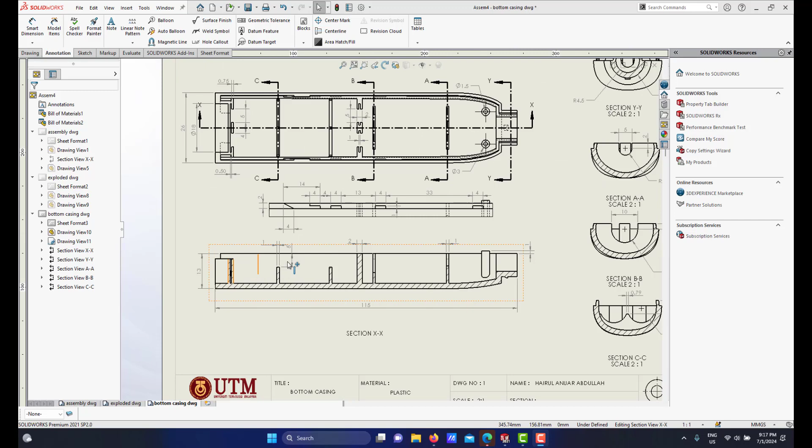Before I show another detailed drawing of other parts, I would like to add some dimensions here because I found out that I need to show, in this detailed drawing, the thickness of this casing, since that's an important feature to show, and also the height of these features here.

Okay, let me bring it in line. Alright, let me save my file.

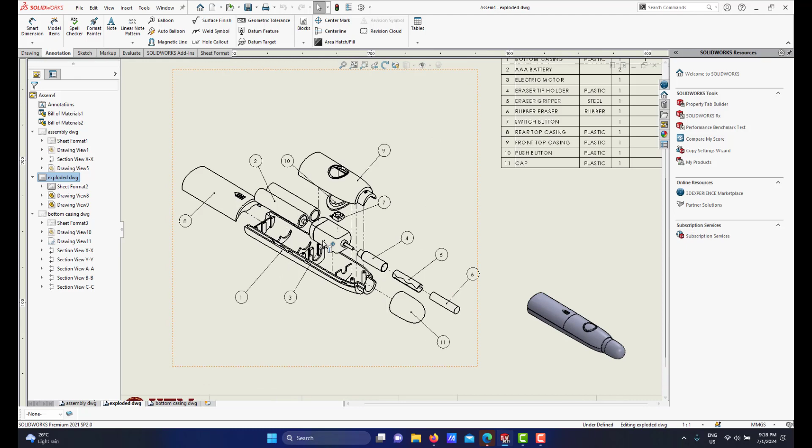Alright, in this video I would like to show you another part. I've already done the bottom casing. Another part is, if you look, the way we do numbering of parts in the bill of material—number 1, 2, 3—is based on the order how we assemble this electric eraser. Number 1 is the base.

Number 2 is the battery. The battery is a standard component, so we don't have a drawing for it. Number 3, we will mount the electric motor, which is also a standard component, so we don't have a drawing. And number 4 here, the eraser tip holder, the gripper, will be mounted on the shaft of the motor.

This is not a standard component. This part we must do a detailed drawing for. It means 4 and 5, eraser tip holder and eraser gripper, we will draw. And the rubber eraser, here, is a standard component, so we will not do a drawing for that.

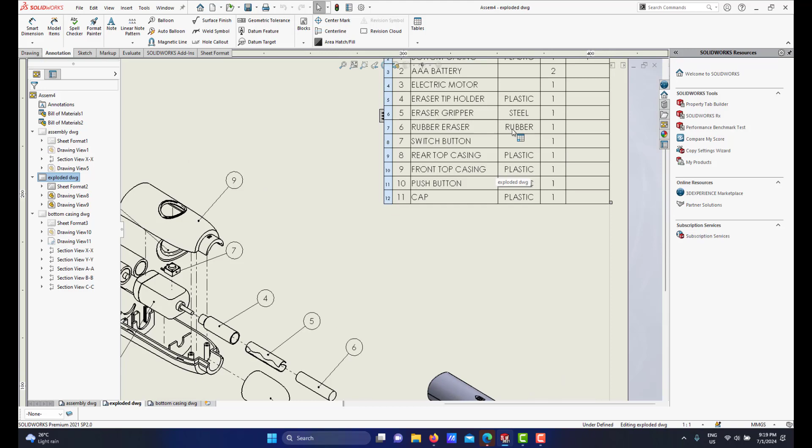About the switch button, number 7, that will be mounted on top of this electric motor—this is also a standard electrical component, so we will not draw it. The ones we need to draw are the tip holder and the gripper, and I will show you how I do separate rear top casing and front top casing drawings.

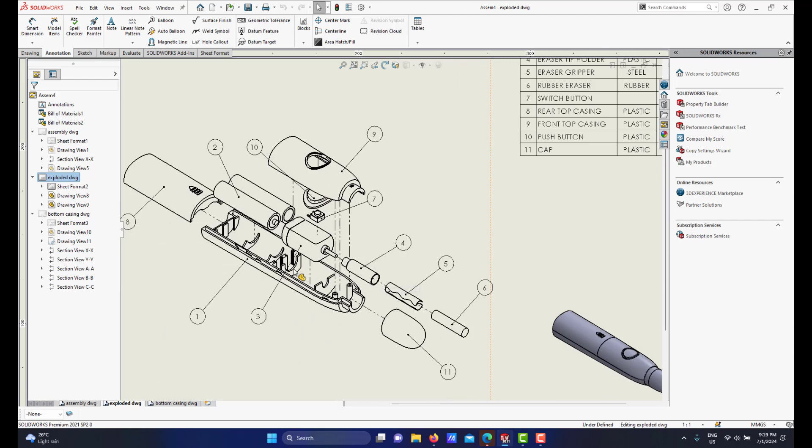But in this video I want to show you how we combine certain small components, which is easy, because in a set of working drawings, sometimes simple components like the eraser tip holder, the gripper, the cap, and the push button can be shared into one drawing. So today I will show you how we do that.

So what I mean is, drawing number 2 will be the tip holder here. This will be drawing number 2. The eraser gripper also will be drawing number 2. The eraser is a standard component, so we don't do that. The switch button is also a standard component.

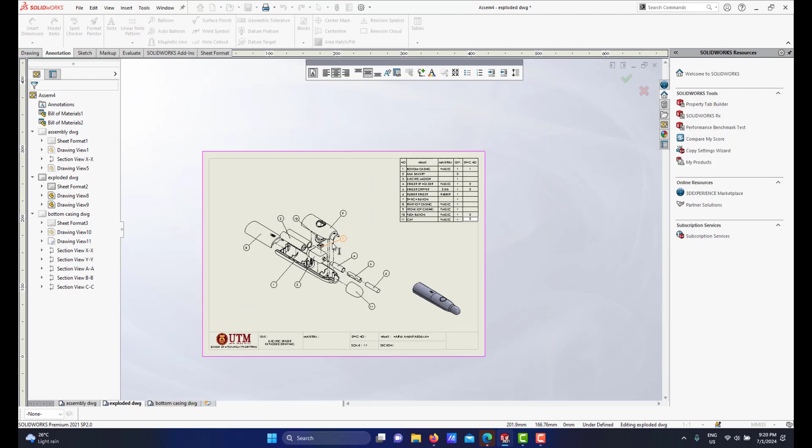The rear top casing will be a different drawing number—I'll show you that not in this video. The push button here will also be shared into drawing number 2, and also the cap will be drawing number 2. So this video I will show you how I do one sheet of this drawing that shares the same drawing number: tip holder, gripper, push button, and cap.

So these things need to be the same here. As I mentioned before, the way I do this BOM is not the most efficient way actually. You can see in other YouTube channels a more efficient way to control the BOM, by setting the configuration of each part file. So I'm just showing you a basic way.

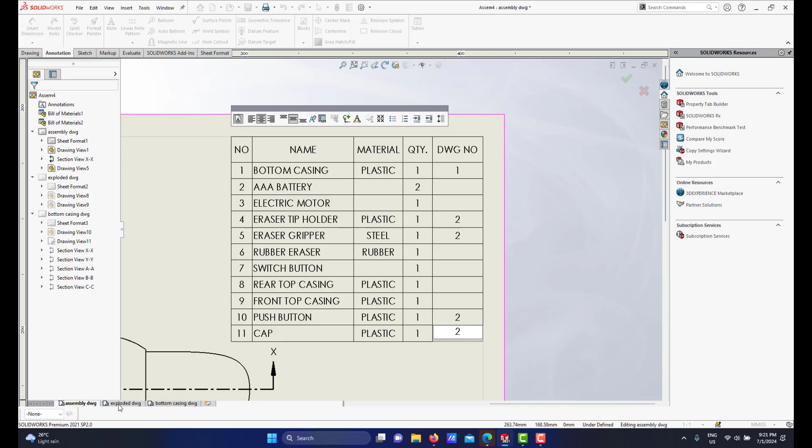Alright, as I mentioned, in the assembly I forgot to put here is the drawing number—bottom casing will be drawing number 1. Same here, the tip holder will be drawing number 2, gripper drawing number 2, the push button also drawing number 2, and the cap will be drawing number 2. So all 4 components—tip holder, gripper, push button, and cap—will be drawing number 2.

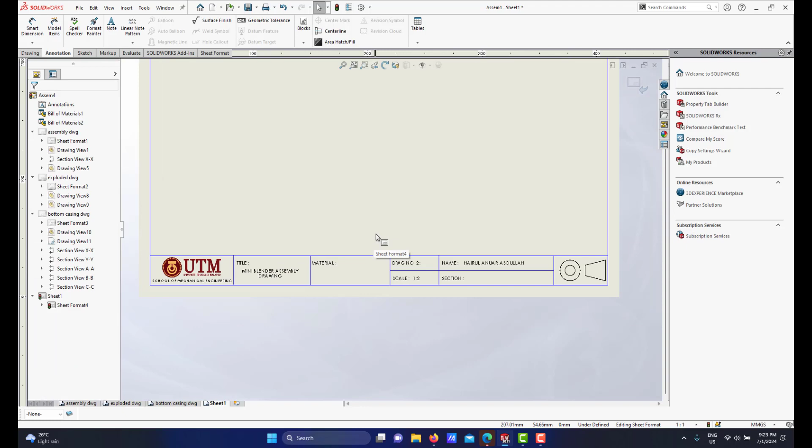So we have 4 components in drawing number 2. I will do the other detail drawing, drawing number 2, since the bottom casing is drawing number 1. So I simply click here, add sheet, so we have a blank drawing with title block already there, but here is drawing number 2. I will edit the sheet format so this will be drawing number 2. About the scale, by default it's a 1:2 scale.

As stated, this is 1:2. I think I will do 2:1 scale because the component of that tip holder, the gripper, is kind of like too small if we do 1 scale.

Also here the title is, because 4 components share into one drawing, so eraser, make sure it's a capital letter, eraser tip holder. We have eraser gripper, and we have the push button, and cap. So these 4 parts.

We are sharing in the same drawing, right? Okay, I go for scale to 1, and material we don't have to put it here because we have 4 components under one drawing. So let me exit.

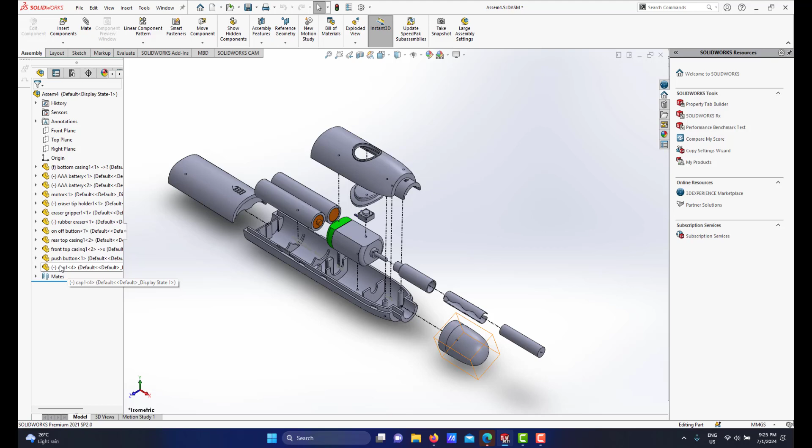But if you know which is your part name and you know how to browse in the drawing, that will be okay, because sometimes opening multiple files uses a lot of memory. But this is the easiest way, because if you open all the parts together, you have all these parts that we want to do for our drawing.

So when we go for this drawing mode, okay, and if you go to the view palette, then if you click at the arrow, everything, the part that you have opened, is listed there. Okay, the first thing I will go for eraser tip holder.

If I select the eraser tip holder, in the menu it will refresh and upload all the parts view of our eraser tip holder. All right, now we have the menu on the right here, all the views for the eraser tip holder.

Okay, before I drag the view, since the eraser tip holder, if you can see the part file, this is the shape of our eraser tip holder. It's a hollow cylinder, a step hollow cylinder, so means that you need to plan the way how you're going to drag which view, appropriate view that will be dragged into this drawing.

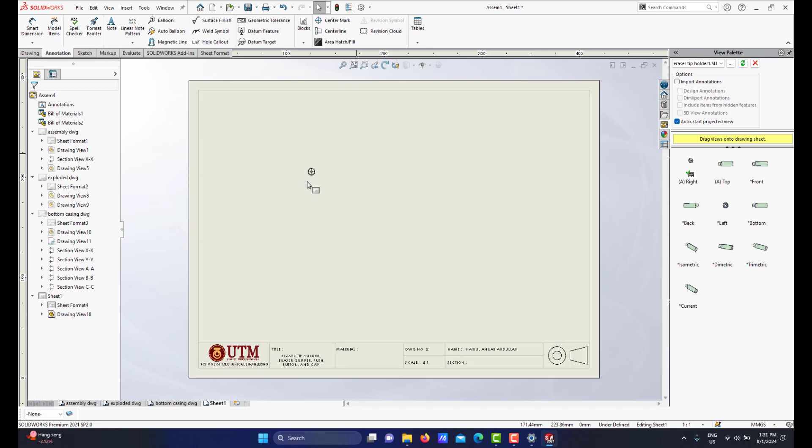Okay, in this case, I will do the right view. Only the right view I drag into this drawing, and I will not go for another view. So I just simply press escape. All right, I have a single view, which is the right view for the eraser tip holder.

So I select this one. The first thing is make sure that tangent edge is removed. And if you look here, the scale by default is 1:1. Scale is too small compared with the A3 paper. So under the setting here, I will do the scale 2 times bigger to 1.

All right, since this right view of this tip holder here is not what I will do, I will do a cutting plane so that on the left here will be the front view, will be the section view. So since this is a right view, this view needs to show the hidden line.

All right, then what I will do under drawing here, I will go for section view, full section vertical. I will select the center of the circle. I click OK, and I will go to the left here will be the front view. Since the view here is a right view, this left view will be the front view, will be our section view.

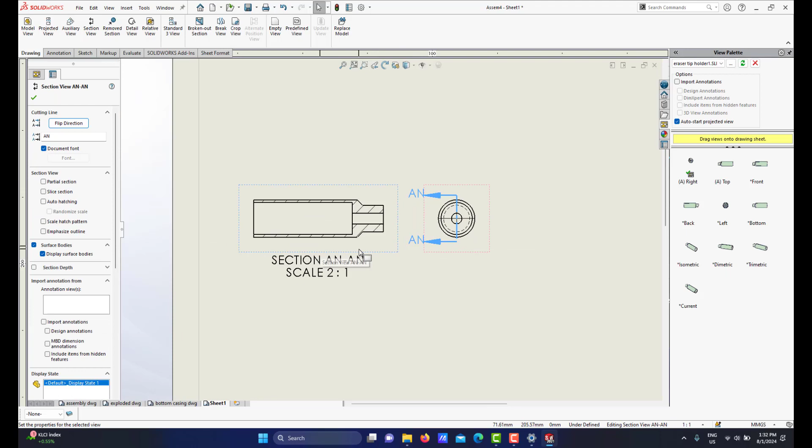Right, and another thing about the label, the label of this is AN, so I just put it X, just click yes. Okay, section at X, and about the direction of this arrow, it's supposed to be flip direction. So now I have the third angle projection of this right view and also the front section view.

All right, one thing is about this cutting plane here. I will right click edit. I will edit the cutting line, and I will edit the sketch, and I will not do drawing. Simply press escape. I make the section line, the cutting line, a little bit longer.

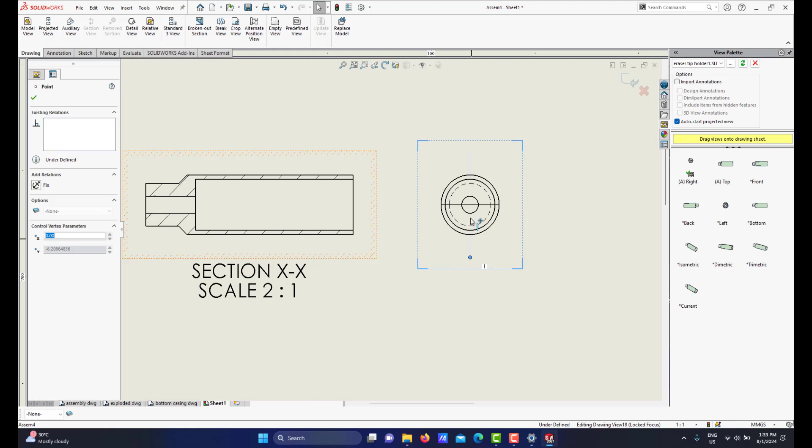All right, I need to set the center mark of the circle. I think I have to do it manually. For annotation, we have center mark. I select the circle—if you look at the menu on the left, if I click center marks, we have a check for use document defaults. I uncheck it so you can control the size.

The tick mark size is 2.54, 0.1 inch. If I go for 1, we get a slightly smaller tick mark. I'll go for 1. If you turn off the extended line, you don't get the extension. In this case, I need the extended lines, so I click OK.

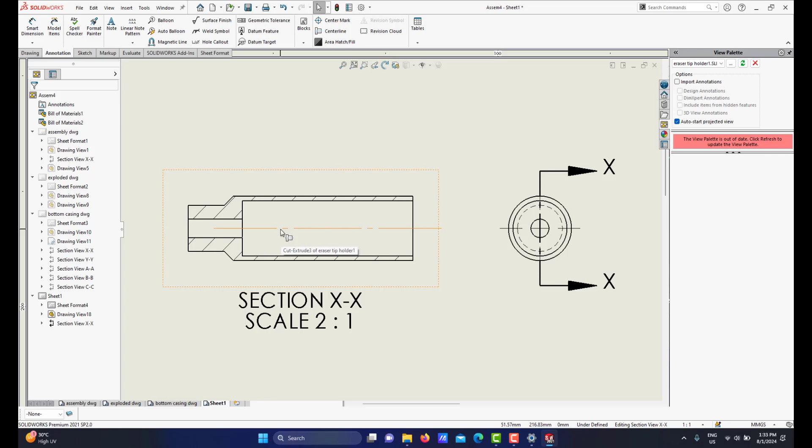Another thing is about the center line. Since this is a cylinder, I need to show the center line, right? Let me drag it a little bit longer, like this.

Since we already set the scale 2 to 1 for this view, the scale label here doesn't need to be shown. So I need to delete the scale. Scale needs to be deleted. I'll bring it downward, then I can put in the dimensions.

This is the eraser tip holder, made of plastic. Since the shape isn't that complex, I can put detailed dimensions on this. Let me show you how I will put in the dimensions.

About dimensions and notation: if I go for dimension, I can get the total length from here to here. We have the icon on either the top or bottom side—I'll go for the bottom side. Then I'll dimension this length here as 19, this line as 20, and this line as 4.

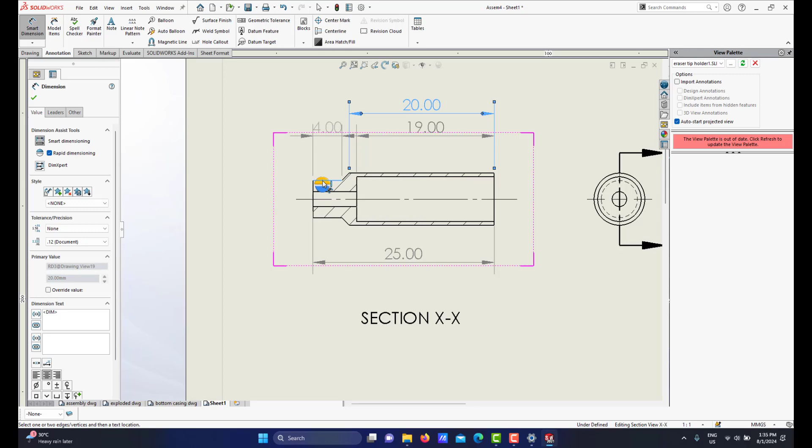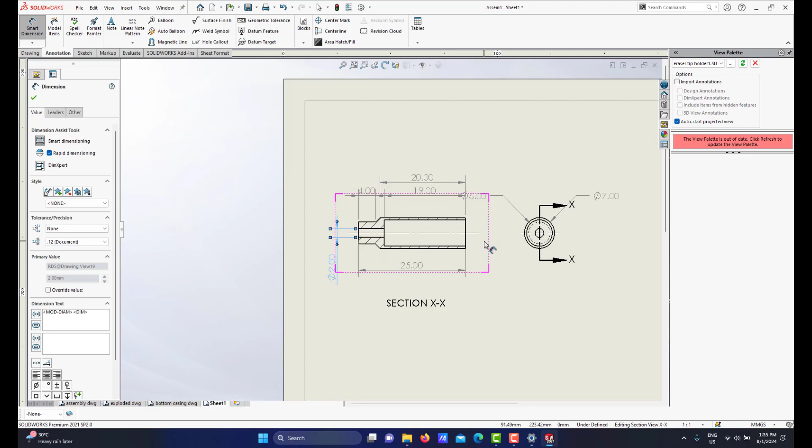Here I can put the diameter 7, and the inner circle diameter 6. And here I can do the diameter from here to here, diameter 2. I need to put this diameter on the right side.

Now let me exit dimension mode and do some adjustment. This one must be set to none, and this one as well, none. Let me pause this video.

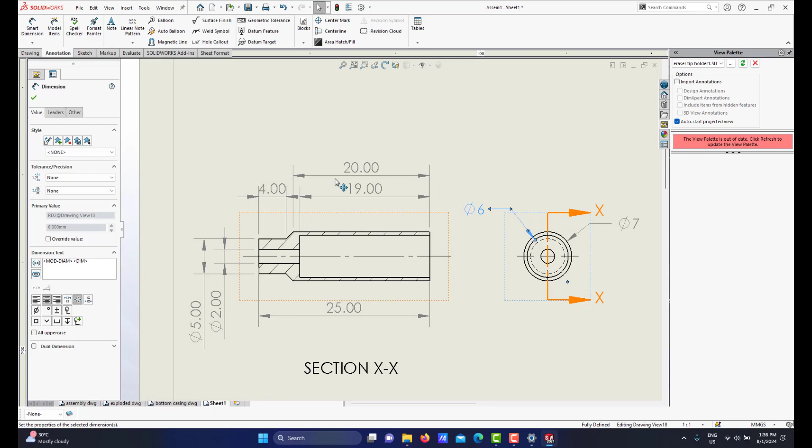The dimensions look good, but the position is too high. I'll move it into a more appropriate location, a little bit lower, and adjust the dimension text. Let me pause this video and resume after I've done all the adjustment.

All right, I've adjusted the dimensions. I made the dimension text non-decimal point, and the position is right, not too close to the object.

This drawing has 4 components. The first one is the tip holder, then I will show you the gripper, the push button, and the cap. Since we have one drawing with 4 components, we need to put local notes at the bottom here.

Please take note, this is very important. The first one is the balloon. I will not point it—if you're pointing to the parts, you'd have an arm, the leader—so I'll just put it like this. So we have the balloon. All right, let me press escape.

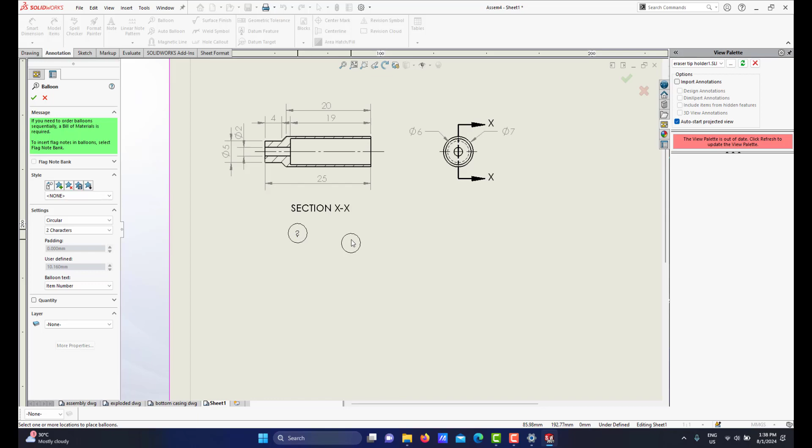Looking at the BOM, the tip holder's part number is 4. You must select here, and under the settings on the left, since we are not using balloon tag item numbers, I can just go for text and put in the part number.

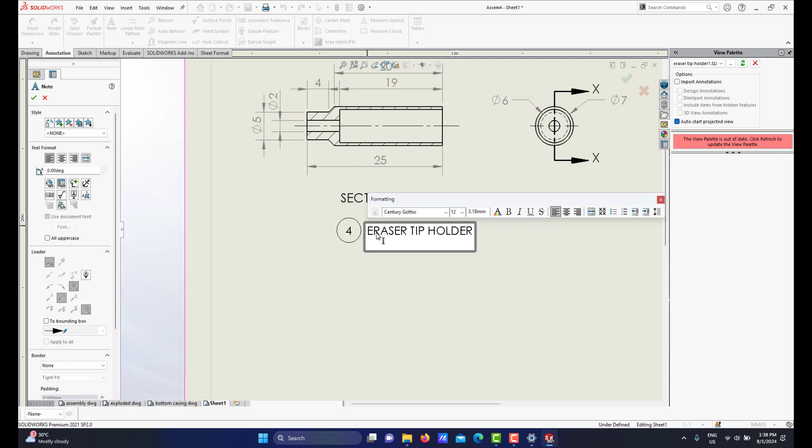So this is the part number, and I have to put a note here. We have the part number and the name of the part, which is eraser—make sure it's in capital letters—eraser tip holder. The next line will be the material, plastic, and also the quantity.

This is very important, please take note: quantity is 1, as mentioned in the bill of material—plastic, quantity 1. The drawing 2 refers to your drawing, so we have title block drawing 2.

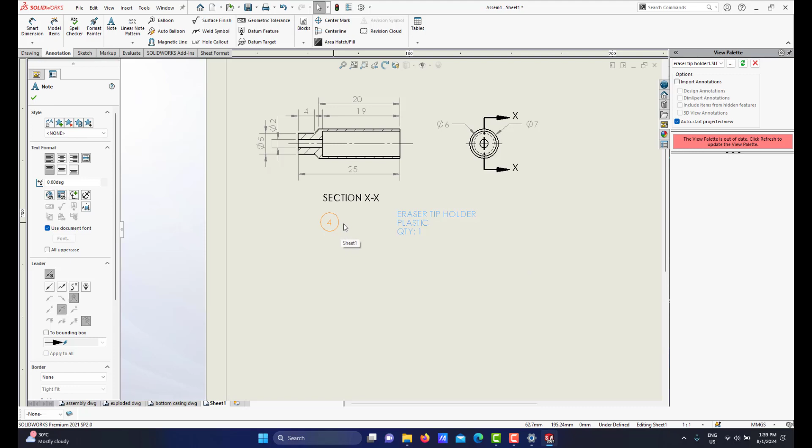So all these components must have this local note here. Put it in the middle like this. Hold on, and this one must be like this—we have part number, we have the name of the part. Okay, this one you need to make it centered, like this.

Okay, let me save my file. Another one will be the gripper.

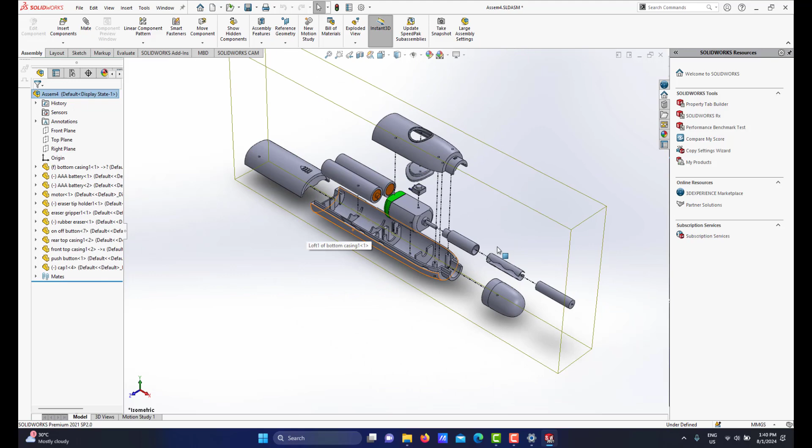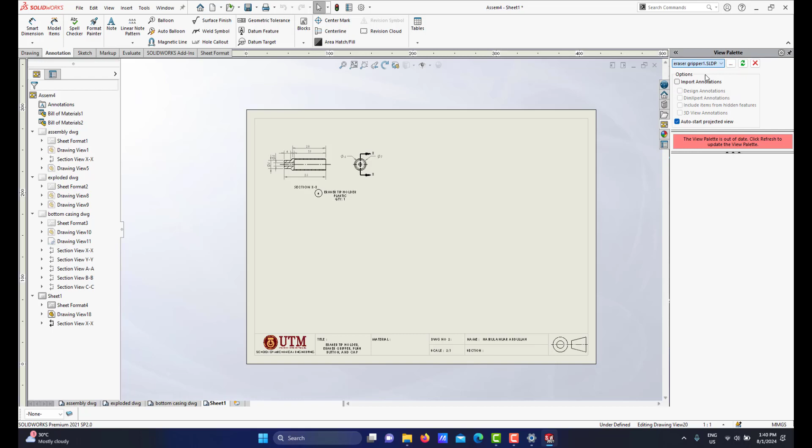Okay, there is a metal part. So in the drawing, if you go to the view palette, you can select your eraser gripper. This is a menu of the eraser gripper. For eraser gripper, if you look at the part, it's hollow, it's a metal part, hollow cylinder, and we have a cutout here. This is the shape of the metal gripper.

So in the drawing, I will go to that view palette. For the gripper, I do the same. I will drag it. Sometimes when you drag, it's kind of linked to your previous right view of the eraser tip holder. To break that, you can just simply put it somewhere here, so it's not auto aligned with the previous view. So this one I just simply press escape.

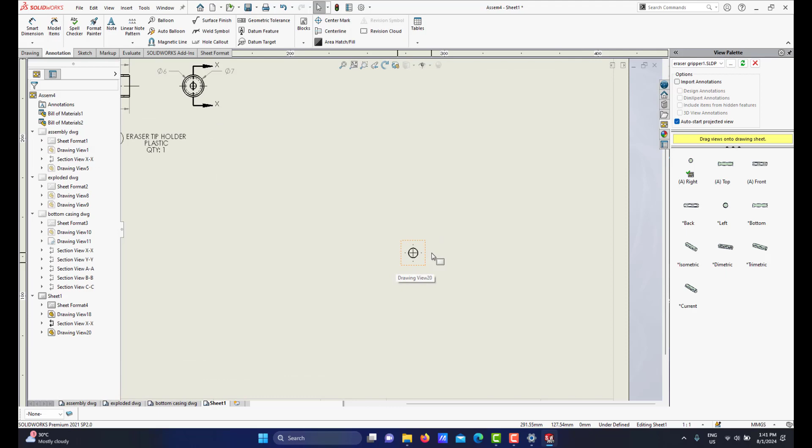I just need the right view only, and the scale has to be one to one scale. I put it here, and this one must be shown, since this view, the right view, has a cutting plane.

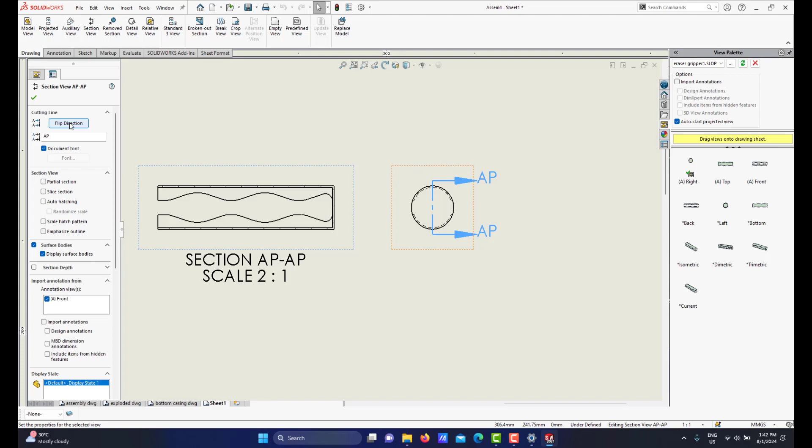About the center mark, let me delete that first. For the cutting plane section view, I will do it at the center point here, then click OK, then drag it to the left, and about this direction, flip direction like that. So this is the left view, which is our section view.

So we have a hatching line there, and this is our right view. The label is not AP, I go for Y, capital letter Y, right? Capital letter Y.

About the center mark here, under annotation, I will do center mark again. Select the circle, so I have the center mark. About the size of the center mark, I use 1, and also we have here the center line.

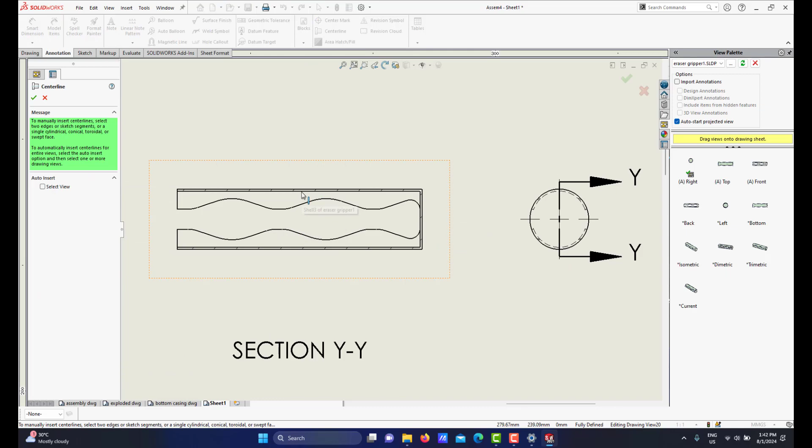Now we can do dimension. The dimension, since this is a metal part, I can show some important feature dimensions. I don't think I will do complete dimension like this curve. We have a cutting curve. Since we have a space here which is a cutting, I will not do dimension there.

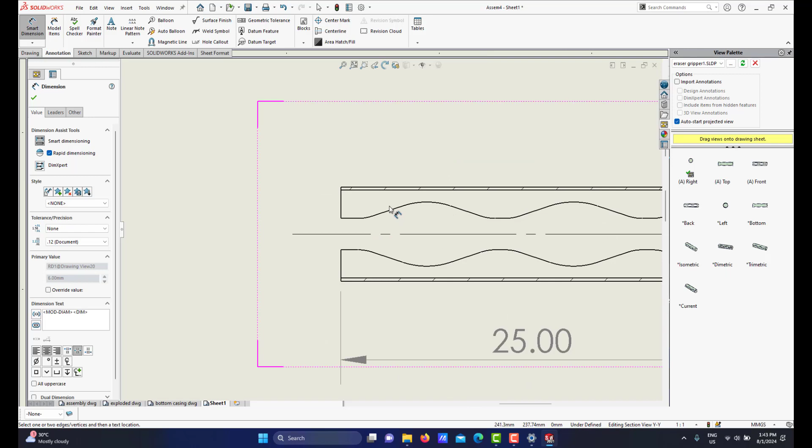As long as I can show some important features, like for example, I can put the dimension for the total length, 25, the diameter here, 6, and also I can give the thickness. So we know by giving the thickness, we know the internal diameter from here to here. This is 0.2.

I think that's all, because since this is a cutting curve, I think they can put any size as long as we have a cutting curve and a proper function of a gripper. This is a metal part, so it need not be that detailed for dimensioning. As long as we can show some basic dimensions, it's quite okay to me. So we have the thickness, the length, and the diameter. I think it's fair enough.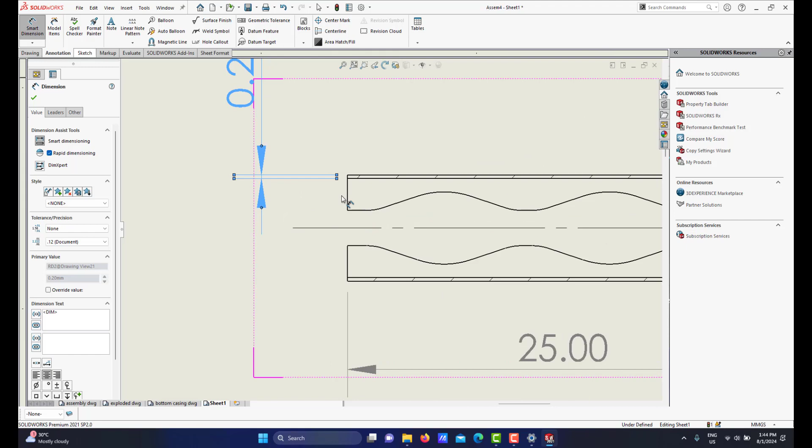Or maybe if you want, just about the gap here, we can put the gap from here to here, it's about 2. So then I will terminate this dimension, then I will do some adjustment.

Another thing I forgot is about this, it needs to be longer, right? Need to be longer. No, it's selecting... actually it's selecting, it's not selecting this. Let me delete this center mark first. This one needs to be a little bit longer.

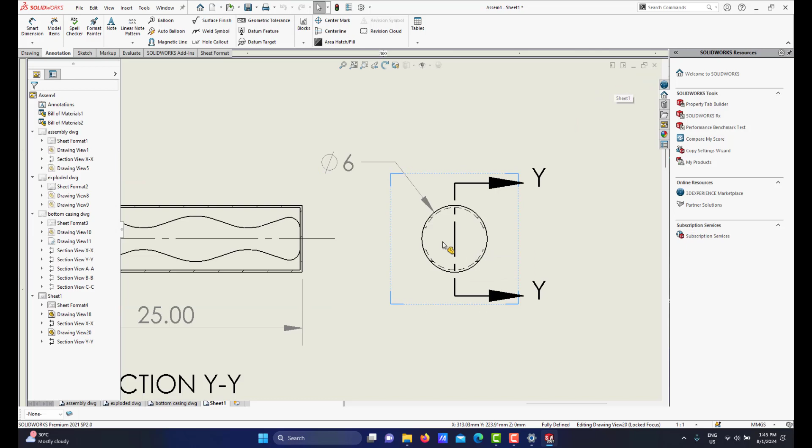And now I will do the center mark again. Okay, let me do some adjustment.

This one, no decimal point. This one as well. Okay, this one we need 1 decimal point. Be careful about this. When you have 0.2, if you go for none, so it will go for 1. Be careful about decimal, this is 1 decimal point.

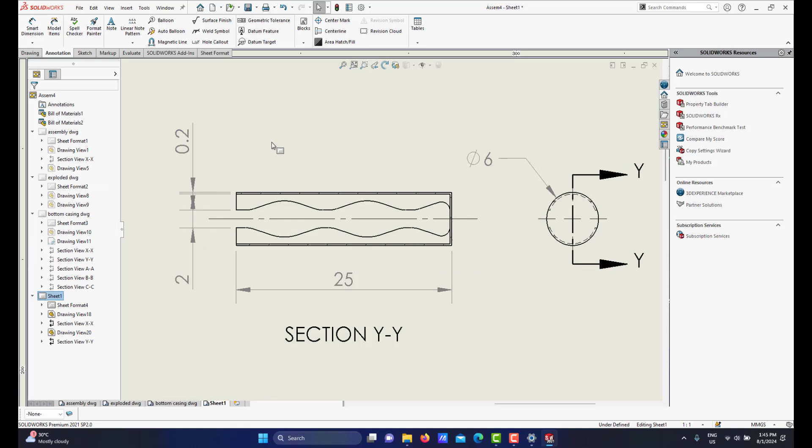Okay, I think this is good enough. About the arrowhead, the pointing of the 2 is like this, this one will be okay. If you don't want to put 2 here, you can put 2 here, shouldn't be a problem. So we have 0.2 there.

And the text is supposed to be here, right? Okay, this would be the detailed drawing of the metal gripper, eraser gripper.

Okay, and this one I simply Control C, copy and paste. Here I put it here, and the balloon also Control C, Control V. This one will be, okay,

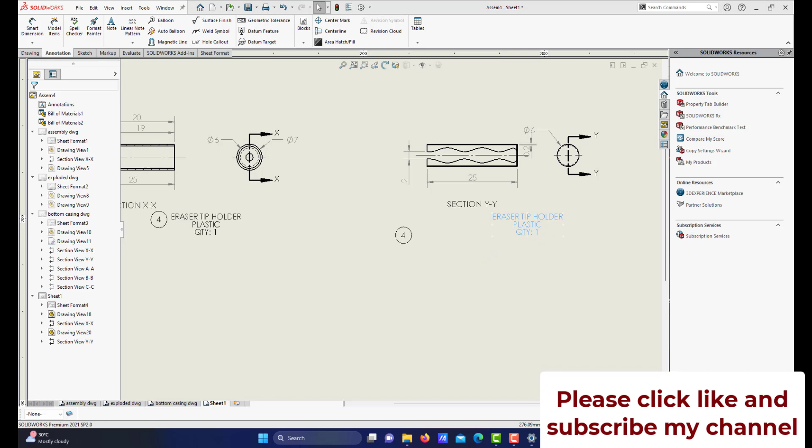Hold on, this will be component. If you click here, just double click, put it 5. Okay, eraser, this will be eraser, the name is part number 5, eraser gripper.

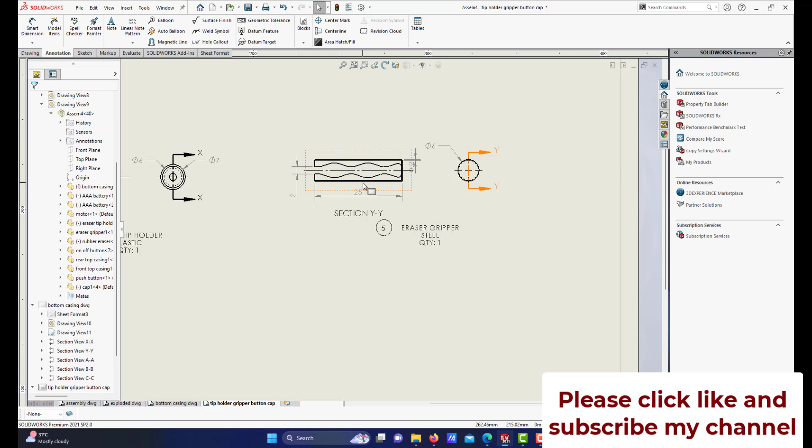Eraser gripper, and the material is steel, quantity is 1. Alright, so I've done the detailed drawing of this part number 5, eraser gripper.

Okay, the next part, if you look here under the BOM, or here the title, gripper, then we have a push button sharing the same drawing number. Because I'm opening a lot of files, let me close certain part modeling files. And here we have a push button, so I go for push button and open the part.

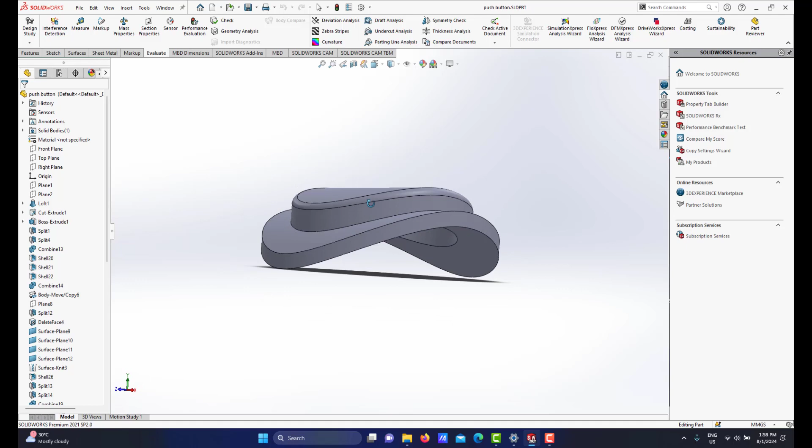Okay, this is a push button, it's a plastic component. I need to mention again, since this plastic component is kind of like an organic shape, to do dimensioning, since we have a curve here, as long as the way they are going to make this push button is by CAM file, and also make a mold in CNC machine and put the mold into injection molding, so the dimension of this push button doesn't have to be really complete.

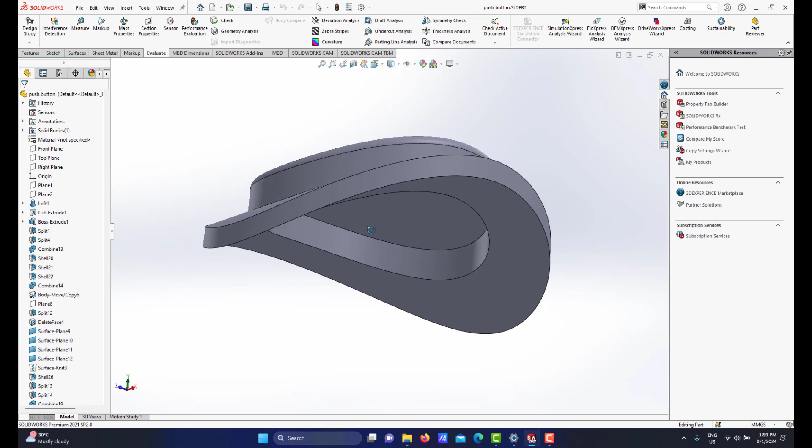So here I will go for push button. We have the menu here. For the push button, if you look again about the shape of the file, it's kind of like this kind of shape.

So what I will do here under the drawing, the view for this push button, I will drag the top view only. I will put it somewhere here. Make sure that it's not kind of aligned. Sometimes when it is aligned like this, when you drag the view, it gets aligned to the previous view.

If that's the case, let me press escape first. We cannot move since it's kind of attached to the previous view, and I can do it by right click under alignment and break alignment, so it will not directly link to the previous view. Okay, this is a top view.

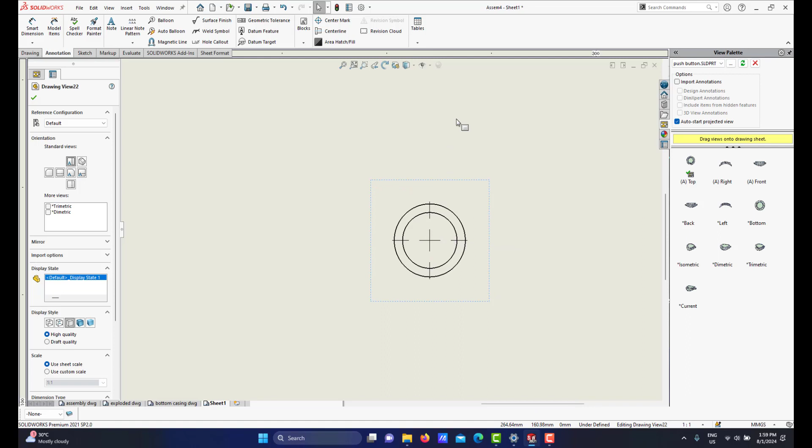Okay, the reason for me to do this top view is that top view, this one must show hidden line. So I will do two cutting planes, the horizontal plane and vertical plane. The horizontal plane will be the front view at the bottom section view, and the vertical cutting plane will be here on the side view, left section view. So let me show you.

Okay, this one I show the hidden line. So what I will do, since this must be to one scale, okay, let me bring this view here. So this might be my top view.

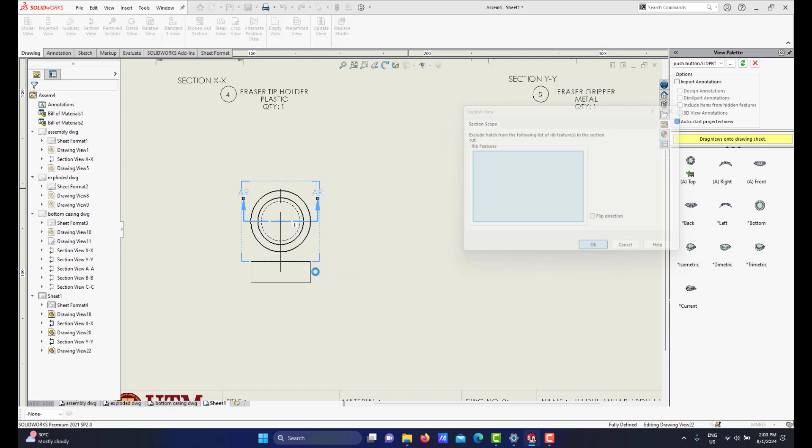So under the drawing here, under the section, I will do horizontal, and I will snap at the center point, then click OK. Then, asking about any component to be removed, I just simply click OK, and I bring it down here. Okay, this is our front view, section view.

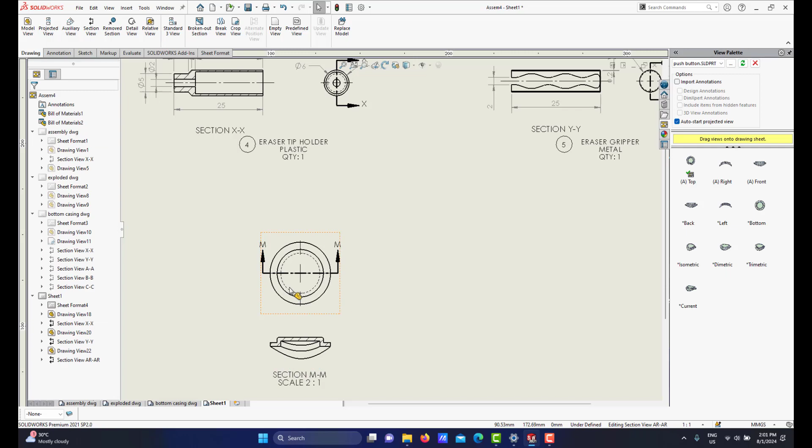Okay, since I already used YYXX, I can make this one, the label is M, right? And okay, this one, I will delete the scale and make this a little bit lower. Okay, this will be MM section.

Let me change note. Let me go for J. Yeah, you actually can put any label that you want. Alright, so this will be section JJ, section lines.

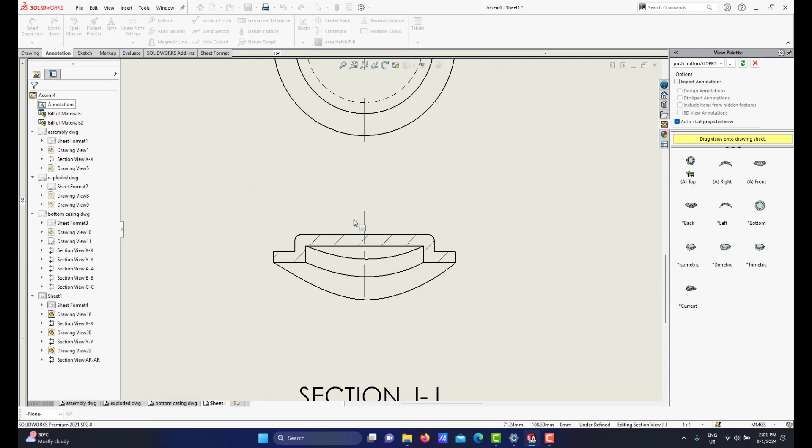And I need to show center line to define, okay, hold on. Center line, select these two lines. Okay, another section is vertical section here. Then click OK. So okay, I just simply click OK here.

Then if I bring the, okay, if you look the orientation of this side view, section view is related to the top view, but I need it to be on the right, on the front section, front side view. So it means this orientation needs to be, okay, about the arrow here, you need to flip it to this direction. Alright, you need to be flipped to direction.

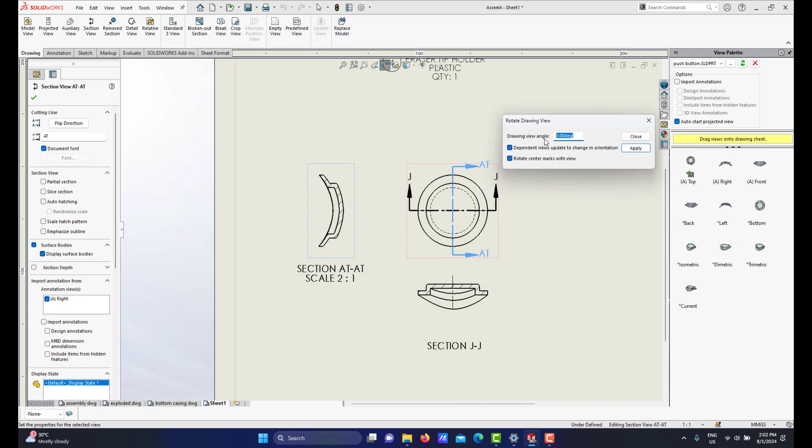But here, okay, the first thing I need to rotate it. I need to rotate this view. I will go for, let me go for negative 90. Okay, my mistake, not 90, will be 90. Then apply close. Okay, since it's kind of linked to this view, I need to break the alignment.

Then I can bring it down here. Okay, but this is a left section view from this cutting AT. Okay, this one isn't supposed to be AT.

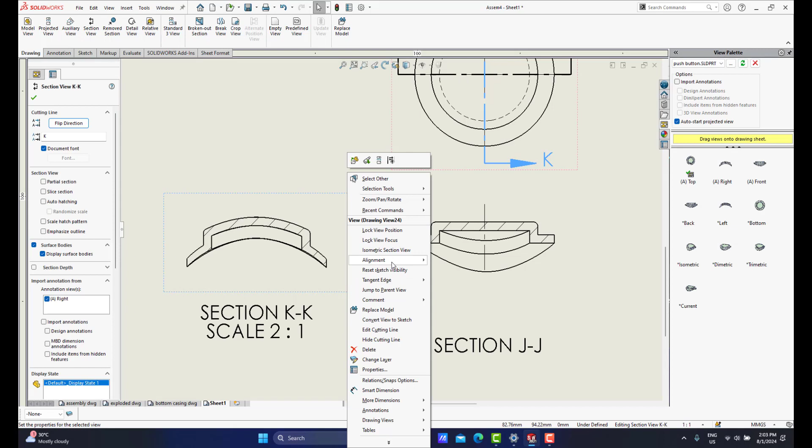Let me put a different label. This one's to be... okay. Right, okay, about this view. So this view needs to be aligned with this front section view. I select this one, right click on it, under alignment here, I'll go for align horizontal by center and select this view.

So automatically it's in line. Right, so here I put section KK here, and this one, delete. Right, and I put a center line here.

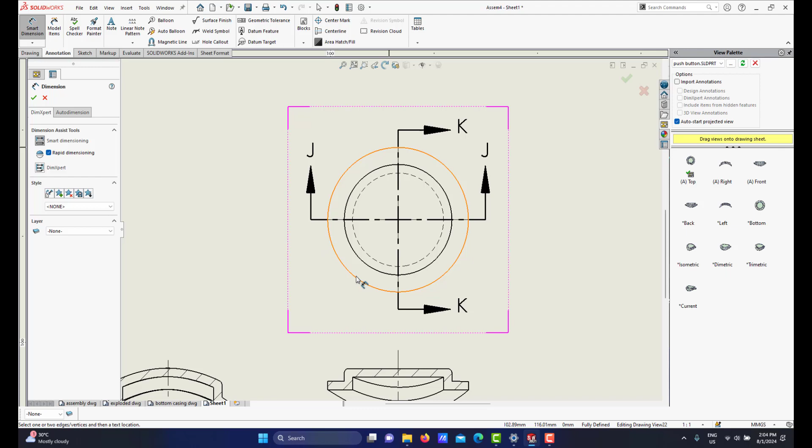Okay, now about the dimension. As mentioned, we don't have to put really detailed dimensions. What I can do is put here that... since this is actually a circle, but the way I did the modeling of this push button, I did it from the front top casing and did a split, so it kind of lost the property of a full circle. I cannot do dimension for the diameter directly, but I can do the dimension of the diameter based on these two lines and these two lines.

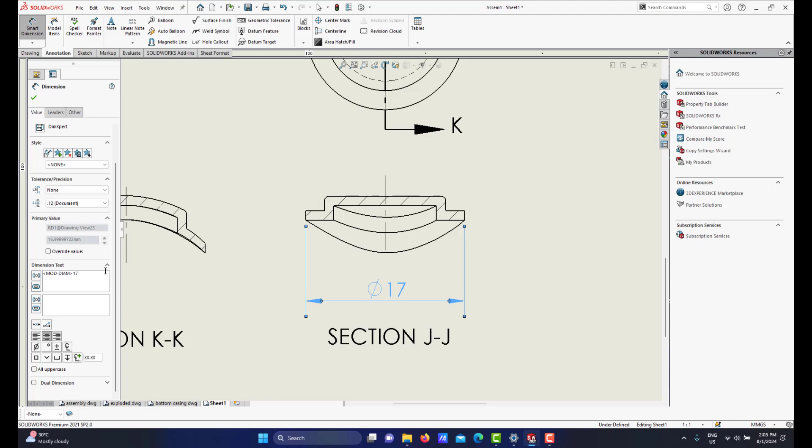So let me put it at the bottom. See, it shows 17. It's supposed to be diameter symbol 17. Under the text here, I'm not using this, I just delete it, click OK. I just replace the text, but here you have a symbol for diameter. I put the diameter symbol, then put 17. So we have diameter 17.

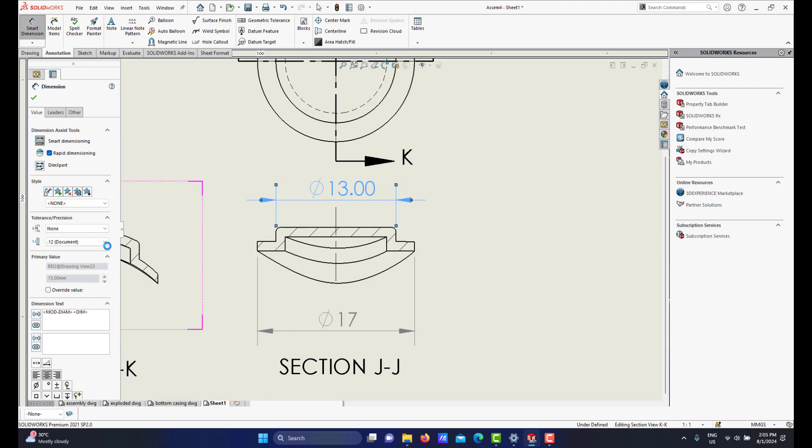About the inner diameter, under dimension, if I click these two lines and put it up here, I can read it as a diameter at this level, no decimal point, diameter 13. Then about the thickness here, 1. Let me just simply put the dimension, later I'll do some adjustment.

So another dimension about this inner diameter here, I can do it from here to here, put it on the bottom side, that's diameter 11. As I mentioned, we don't have to put really detailed dimensions on this—as long as we show some basic dimensions, that's good enough.

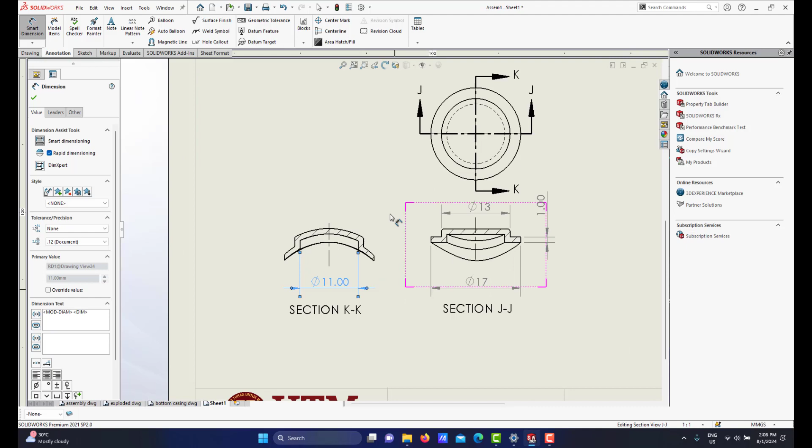I think another dimension I should add, okay, I have the total diameter is 17. Another important dimension is the total height here, from here to here. If I go for dimension and try to select this line up until this point, I cannot put a dimension there.

So what I need to do is add some points here, manually adding a point under the sketch. I'll create a point as long as it's close to and touches the line—that will be the point, so I can use it as a reference for dimension. Under annotation dimension, I can use this point up until this point.

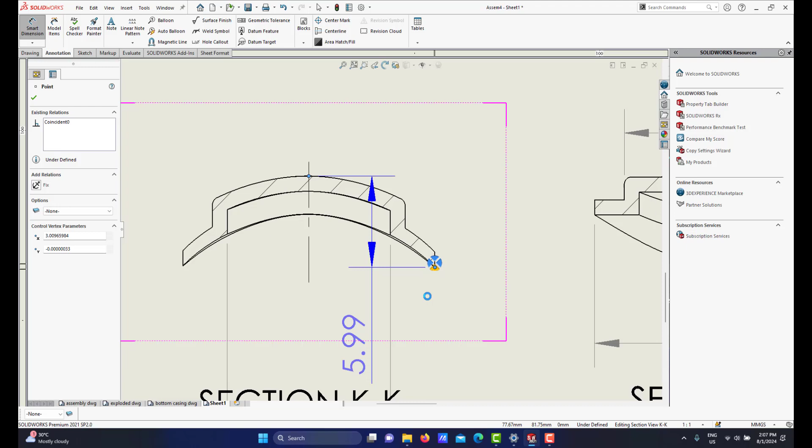Then I'll go for vertical dimension, just click OK, and bring the dimension to this side. It shows close to 5.99 for the total height. Let me drag it a bit like this, I can put it like that, this is 2 decimal point. Okay, do not change, this one's supposed to be here, a little bit closer.

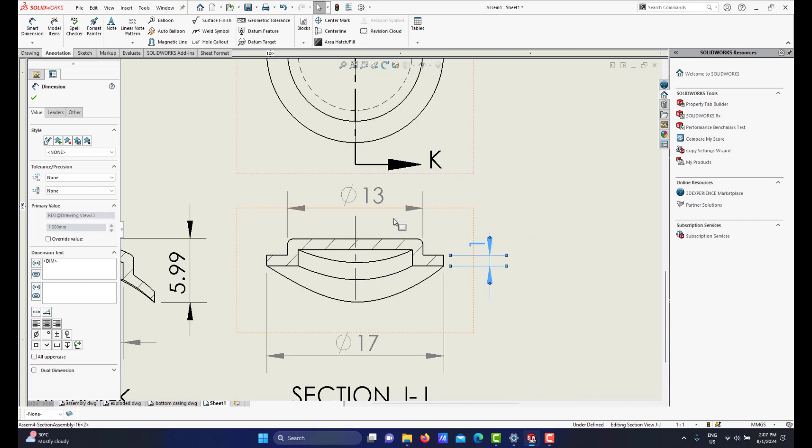No decimal point, no, this one, no decimal point. I think that's it for dimensioning the push button, as long as we can show some important features, right? Let me save my file. So this will be the dimensioning of the push button.

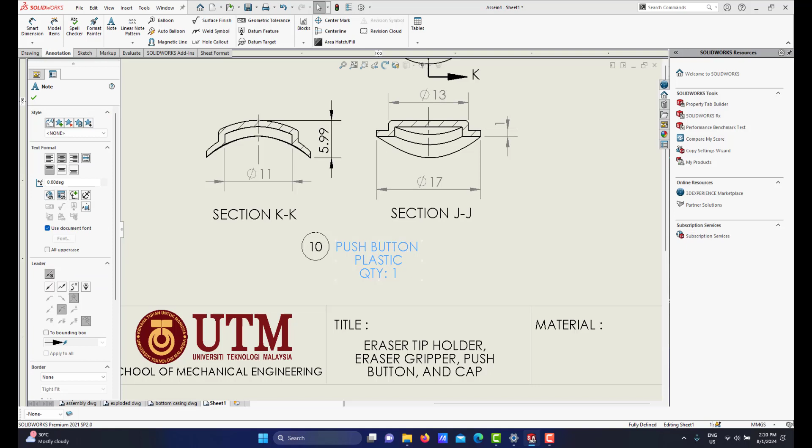So here I Control C, Control V, and this is supposed to be the push button, which will be component part number 10. The name is... right, okay, this is the complete detail drawing of the push button.

All right, the next part will be the cap. If you look here, the cap—the cap here is cap one. Let me open it. So there's a cap part file, it's a plastic component, transparent plastic, and I need to do the detail drawing for this cap.

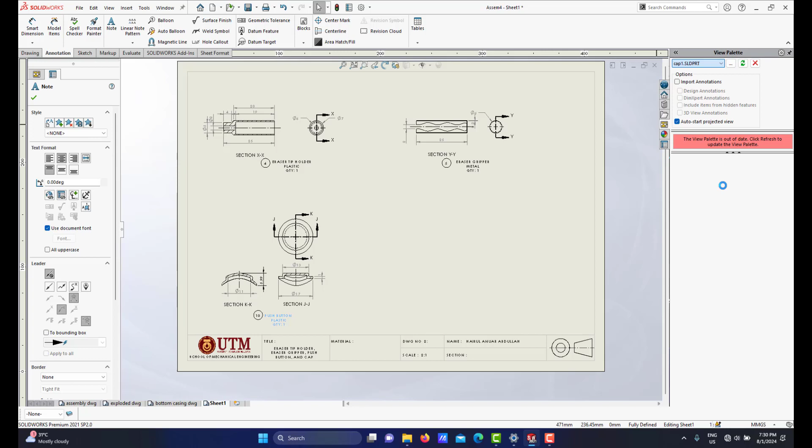Okay, the view palette, yeah. If I scroll down, I have cap one. For the cap drawing, what I'll do is drag the right view. Okay, just drag it here, and I will not go for other views. I just press escape.

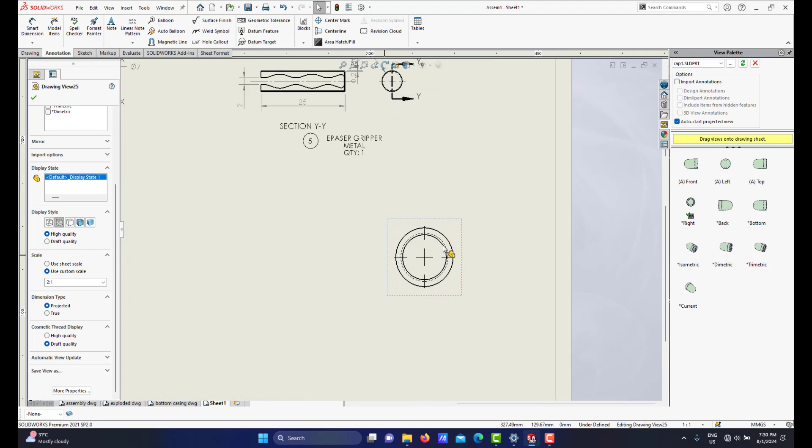This one, the tangent edge remove, and also the scale is 2:1, and hidden lines must be shown. The cap, I only need the right view and also the front section view.

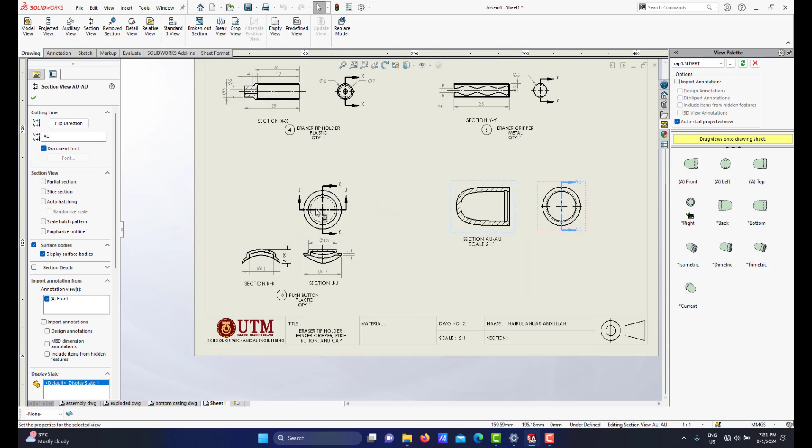So I'll go for section view, full sectioning at the center point. Click OK, then bring it to the left here. So this will be the front section view, and the direction of this arrow must be flipped. Right, so I already have labels JJ, KK, and this will be, I'll put it, I can go for M.

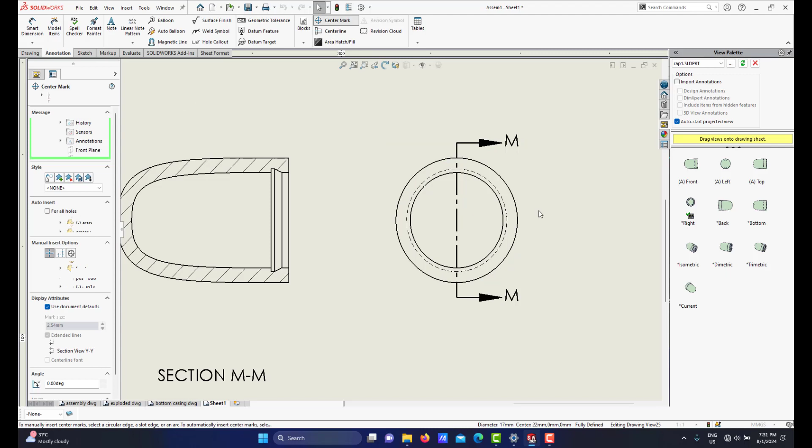Let me go for the center mark, like this. Hold on, not center line, center marks. For this center mark, I go for a value of 1. I need a center line here, so I cannot select this curve since it's not a straight line, so I will go with this segment and this line.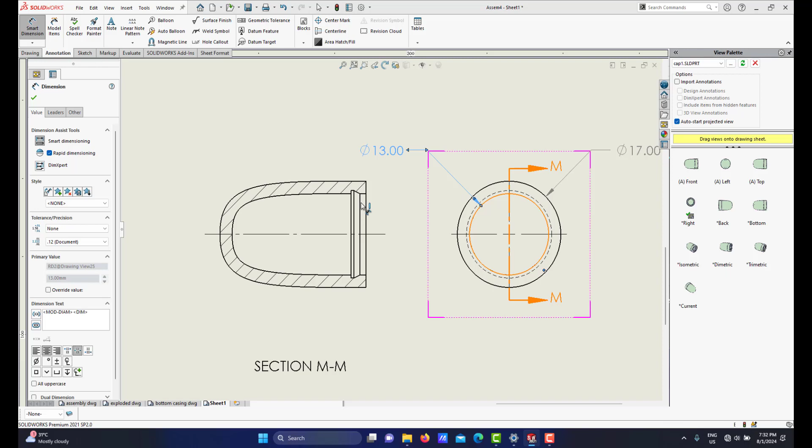For the dimensioning, I can show some important features to be dimensioned. For example, the diameter, and another is the inner diameter here. Also, if you see this dotted line, it means that since we have a groove here, there is a groove slot. If you look at the part modeling, we have a groove, revolve, cut revolve. So I will give a diameter for that groove.

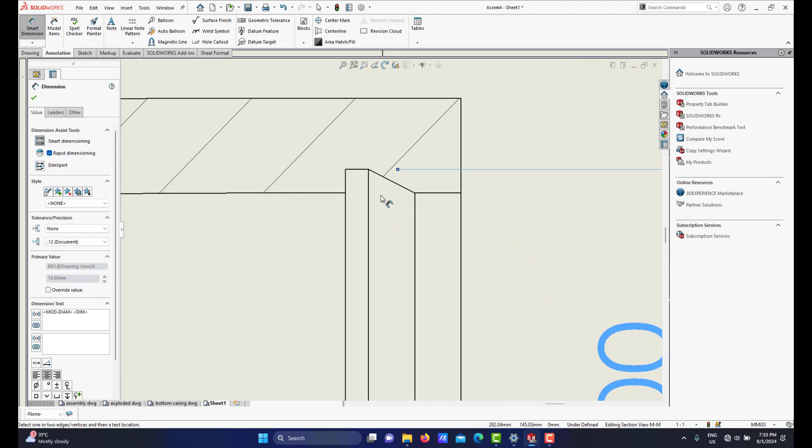I can go for here and here, so I have a diameter of 14 there. And also the distance from this line to this line. Let me do this, this is 1.

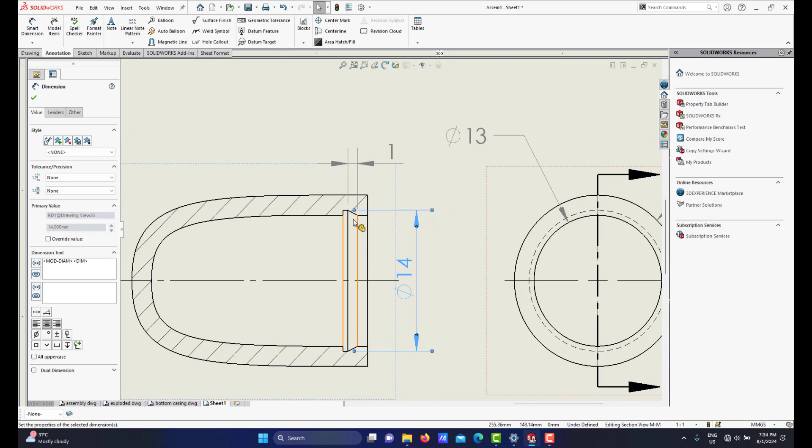Let me do some adjustment here. Okay, here is none. And another dimension is this. I already gave this inner diameter, and I already have the distance here, and about how the distance from this line to this line.

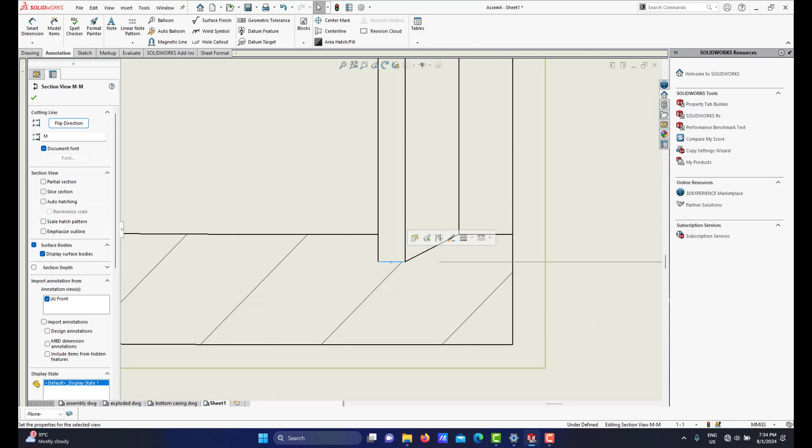Hold on, I will do the dimension first, from this line to this line, there will be another dimension of 0.5. And another dimension is, the distance is already given, this length. Hold on, dimension 0.5.

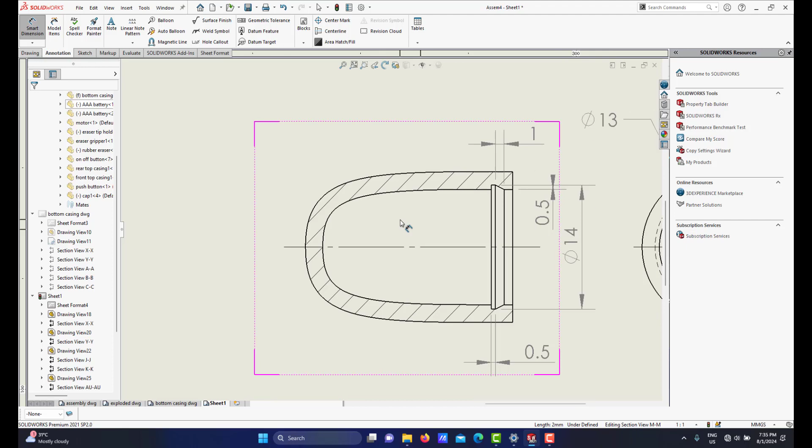About this curve, I don't have to show a really detailed dimension since this is a plastic component. As long as I can show the total length. If I want to show the total length of this cap, going from this line to this curve, it cannot point to the total length. So what I will do is create a point here. If I have this point, it means I can show the length from this point up to this line, then I can go for the total length of 24, right?

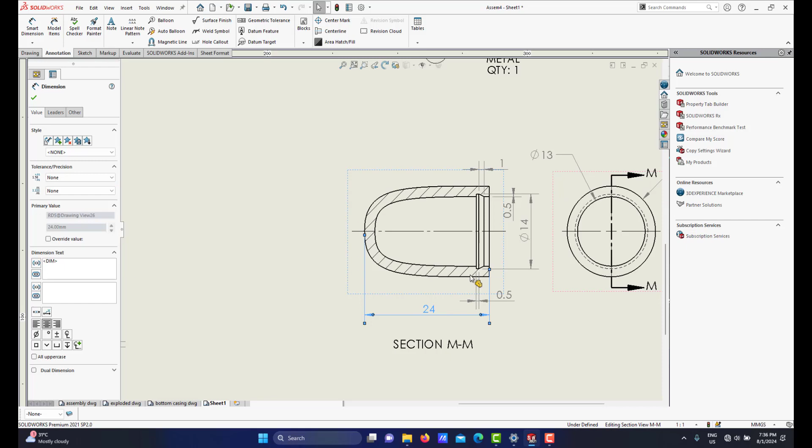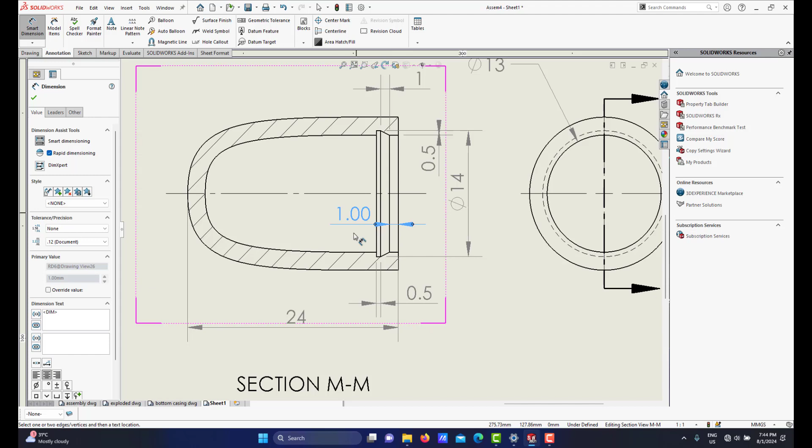Okay, right, this one must be none. I think the final dimension should be this, the distance here. So I will do a dimension from this line to this line. Sometimes it's allowed to put the dimension inside the object. If we put it inside, in terms of clarity, it's much better, so I would put it inside because I have a dimension 0.5 here. Right, so this would be the thickness here, the depth of this position.

We have a groove here. I think I have completed all the necessary dimensions. I don't have to give the thickness here since 13 and 17 are already given, and we know that the thickness of this cap is 2, right?

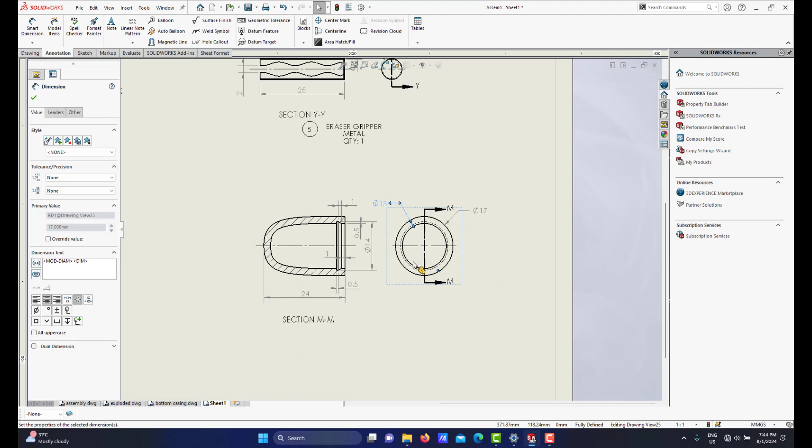And another thing is about aligning the position of your dimension, right? There is a dimension for the cap, and I will duplicate this. I can select this, Control C, and here I will paste it. So the cap would be part number 11, plastic, and quantity is 1, right?

So here is 11. Okay, the name is cap, quantity is 1. Right, let me save my file.

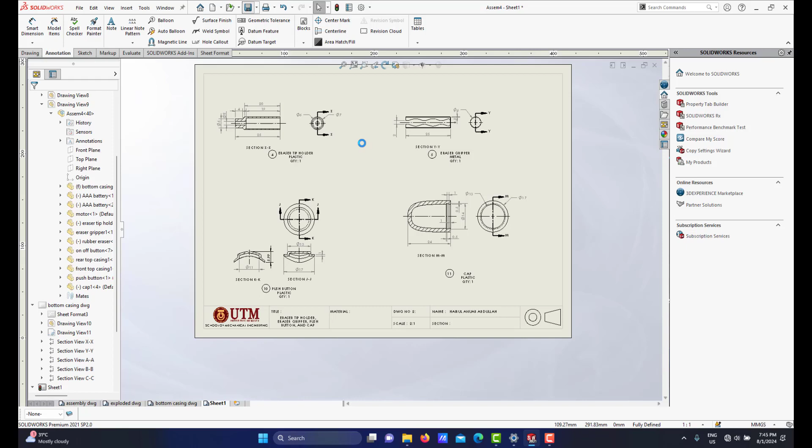This is the position where I paused the video, and I resume to the position where I have adjusted the position of all the detail drawings of these 4 components. So we need to position it so that it is kind of balanced, centered to this drawing paper.

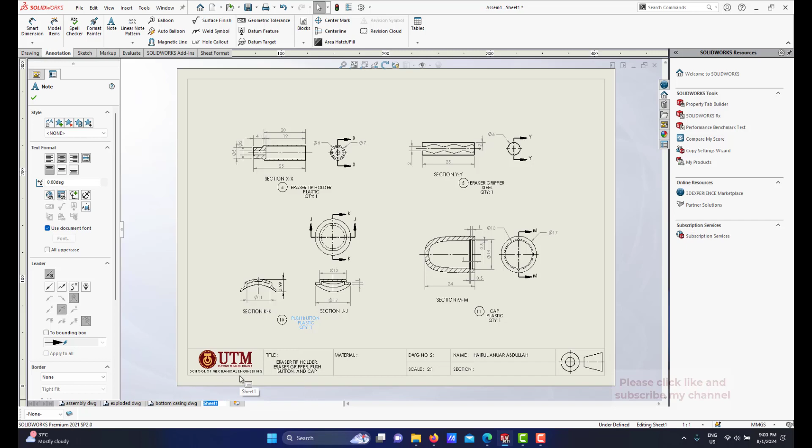I think the last thing to check is here. If you look at the bottom, it's stated that it is sheet 1. I need to rename it because later you will save as PDF, so you know which drawing sheet to be converted to PDF. So I will name this as the tip holder, gripper, button, and cap drawing, right? And everything is drawing number 2. We don't have to put the material here because we have 4 parts shared in one drawing.

I think that's all for this video of the detail drawing of these 4 components. Inshallah, in the next video I will show you how I do the detail drawing of the front top casing and also the rear top casing.